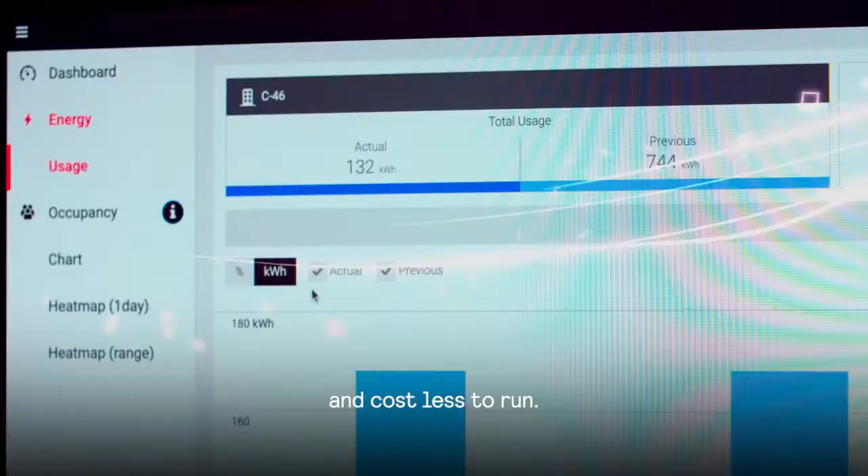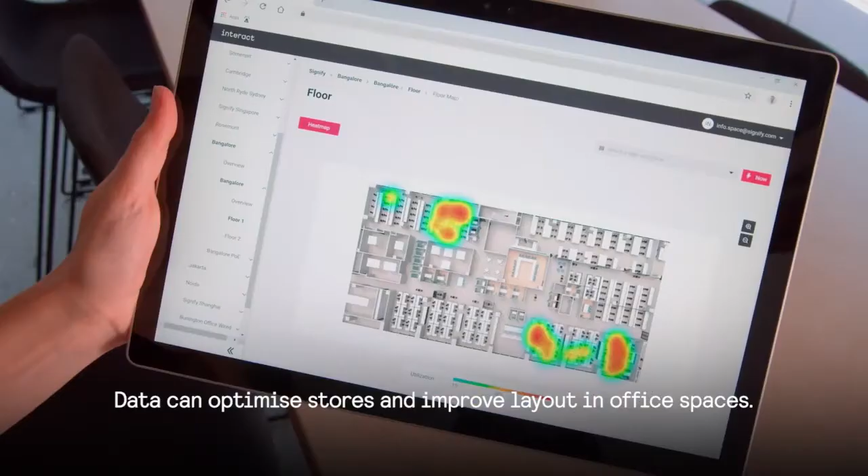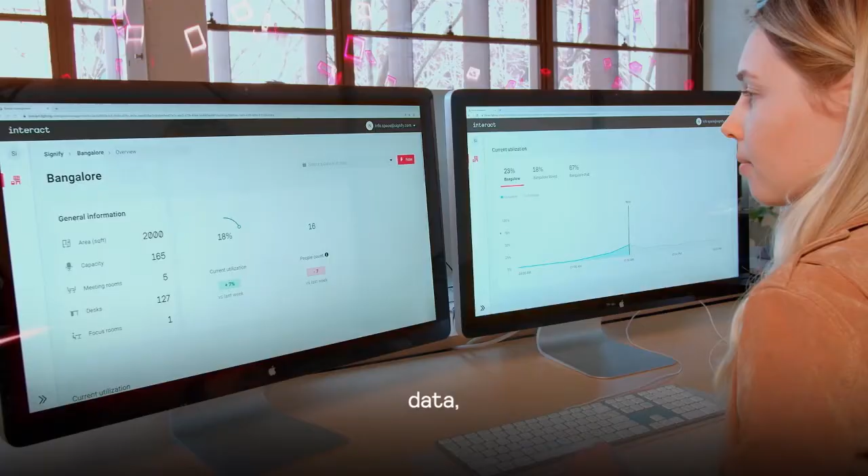Light now brings you insight. By collecting data, it enables intuitive buildings and efficient cities that are easier to manage, plan, and maintain, and cost less to run, so you can locate a free desk, an empty meeting space that's nearby, or an item on your list. Data can transform service and streamline operations so that they're more efficient. Light can make you more productive by adjusting to the way you work. It can help you wake up refreshed. Data can optimize stores and improve layout in office spaces. It can create safer conditions through predictive lighting maintenance and automatic illumination in cities and factories. It can inform environmental monitoring for healthier buildings. By integrating light, data, systems, dashboards, and developers, Interact creates light that informs. Light that beautifies and excites. And data that illuminates.

In this presentation, I'm going to talk a little about the history of how we arrived at the current moment in lighting technology, define some key terms, and then give an overview of what Interact is and what Interact lighting software and systems can do for businesses and cities.

Then, without getting too technical, I will talk about how Interact works before giving a rundown of what Interact offers in the different business sectors for which we have designed solutions. Finally, I'll give an overview of the Interact developer environment community and support that Signify provides Interact customers globally.

First, a little history. Signify started life as Philips Lighting, one of the first manufacturers of electric lamps in the late 1800s, and a global leader in lighting for the past 125 years. In 2008, Philips became the first company to produce a viable LED replacement lamp for consumers, and also became a world leader in professional LED lighting with its acquisition of pioneering LED luminaire maker Color Kinetics.

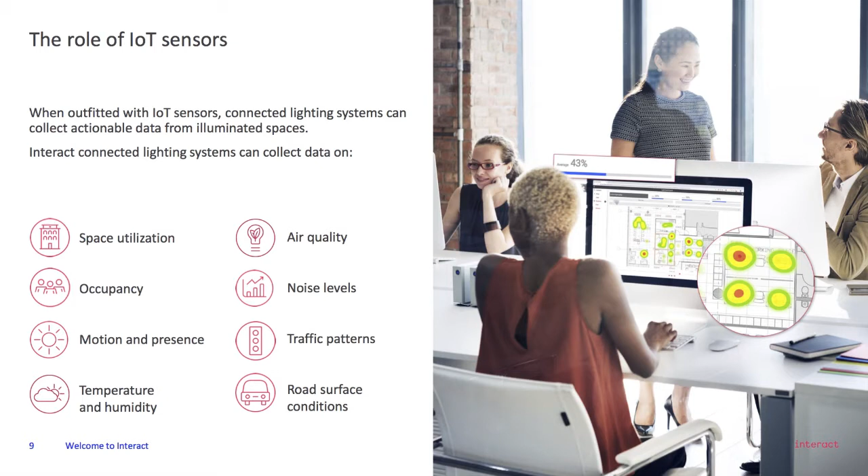When outfitted with sensors of various kinds, connected luminaires can also collect data about the spaces they illuminate. This data can be gathered, stored, and analyzed to provide new business insight and to drive new applications that deliver both superior lighting capabilities and capabilities beyond illumination.

This, in a nutshell, is what Interact is all about. And when we talk about Interact, we can really talk about it in 5 different but related ways. First of all, we talk about Interact as both the lighting software that works with connected luminaires, sensors, and other devices in the lighting network, and also as the connected system itself, which includes the Interact IoT platform.

I'll talk a bit more about the Interact IoT platform later, but briefly, the platform stores data gathered from lighting system operations and the professional spaces that the lighting systems illuminate, allowing managers to analyze that data for deep, actionable insight.

From a lighting perspective, Interact is lighting system monitoring and management software, which uses the two-way connectivity of luminaires and other system devices to keep track in real time of what's happening in the system. This includes system status, energy usage, occupancy and traffic patterns in indoor spaces, the ability to group and zone luminaires for better management and monitoring, and automated fault detection, all accessible through browser-based dashboards for centralized system control and operational visibility across an entire organization.

From an IT perspective, Interact offers IoT capabilities to the users of spaces. Lighting systems represent a natural way of distributing smart systems in illuminated spaces. Lighting is already installed where everybody needs to go. It's powered, and it's typically overhead, which is an ideal location for deploying sensors throughout a space.

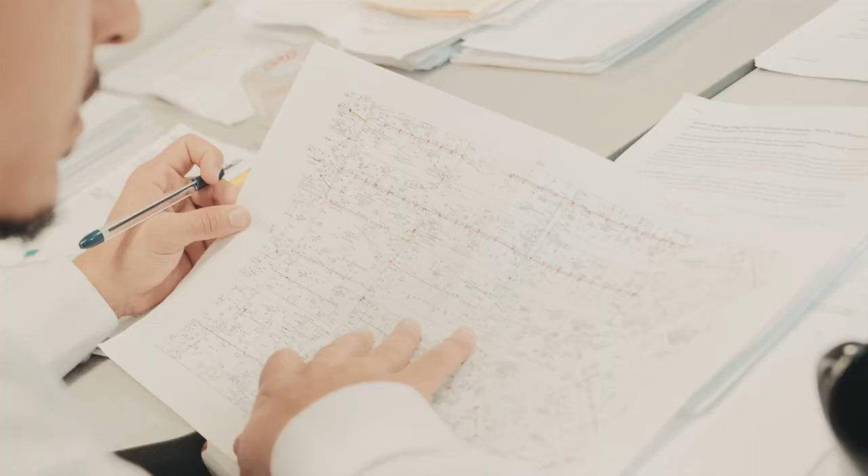When we first started the streetlight conversion project, it was about reducing our carbon emissions. But as we looked at the technology and as we saw what was possible, it really became about social justice and equity issue. We're about 70% through the conversion, and we've already seen $2 million in savings.

And that's part of equity too, right? If we can ensure that we're reducing our costs, that provides us with funding to make sure that we're able to settle our union contracts and pay just wages to our employees, and then have resources to focus on issues that are important to our neighborhoods.

What we're looking to do in White Plains right now is to explore every opportunity we can find to do our part to try to decrease carbon in the atmosphere, to try and make the city a safer place. We have to look for ways to save money.

Many cities are in situations where even issuing bonds can be a problem because of their debt limit and things like that. And NYPA came and actually did a whole matrix for us explaining how much money we can save by moving ahead with this all at once. The savings would outweigh the cost of the program, including the installation and the purchase of the fixtures.

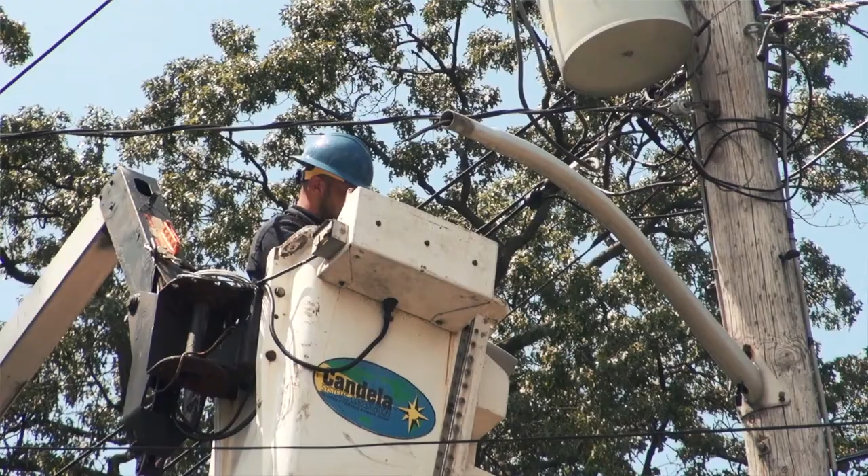The lights are probably good for 25 years. You're getting a better quality, a better outcome. You're saving the taxpayer money both immediately on the electric savings, but long-term on the maintenance savings. Our lights were completely deployed in about a 9-month span, and it was done with really no impact on our staffing.

Streetlights are an important asset within a community, as they are typically installed throughout all the neighborhoods. The streetlight system acts as the critical backbone for smart city deployment by providing the physical infrastructure to install IoT devices. The lamps allow us to attach other technology.

So in areas where we have lack of access to the internet, it opens up the possibility for us to find a partner who can provide internet services in our lower income neighborhoods. Cobra heads, we converted about 9,600.

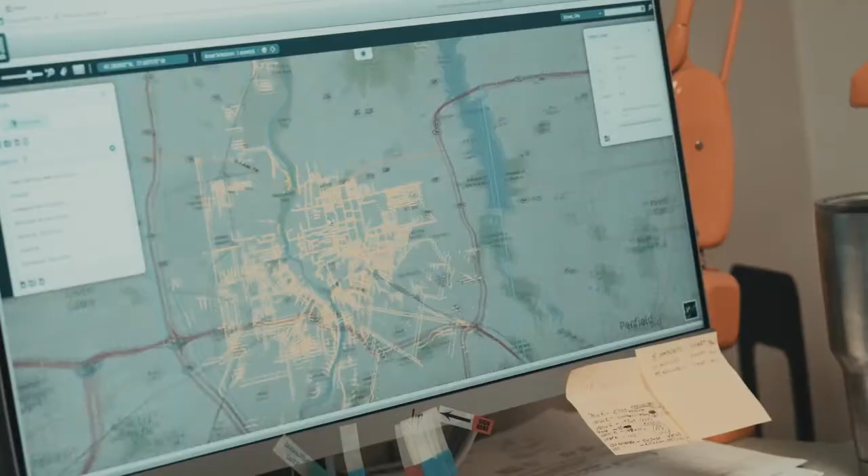In the next phase, we continue to pursue smart city initiatives. I think this is just the beginning, and I hope Interact continues to advance so we can take advantage of those things. I wanted to plan for the city of the future. We need to ensure that we're investing now for generations to come.

In indoor, Interact provides several software suites for different kinds of spaces. Interact Office for smart buildings, workspaces and educational institutions, Interact Industry for warehousing and manufacturing, Interact Retail for fashion shops and food and large retailers, and Interact Hospitality for hotels.

Let's take a look here at Interact Office, as it has the greatest number of software applications, many of which it shares with the other indoor software suites. For the managers of workspaces, Interact Office features a dashboard for real-time monitoring and management of the lighting system, similar to the one for Interact City.

But instead of a map of city streets, lighting system managers can see luminaires deployed across a floor plan of the illuminated space. Also, like Interact City, data-rich automated alerts signal system issues and speed repair and recovery.

Space optimization is an important consideration for most businesses and corporate real estate managers. With occupancy and activity sensors, Interact Office can give both real-time and historical views of space usage, allowing managers to identify underused areas of floors that could potentially be closed, lowering costs.

So we use real-time data from Cisco CMX to count people. We use real-time sensor data from Signify multisensors to measure, for instance, temperature and humidity.

You can think of a digital twin as a bridge between the physical and digital world. This pairing of the virtual and physical worlds allows analysis of data and monitoring of systems to head off problems before they even occur. In the building, we have several technologies to support space optimization.

As a base technology, we have used Wi-Fi triangulation based on Cisco CMX. So we combine this technology together with Signify visible light communication, and the resolution here is about 50 centimeters.

The Interact Office solution from Signify is based on open APIs. This means that the solution integrates with Active Directory and Exchange. It integrates to meeting rooms, users, calendars, and other resources in the building.

We have lots of happy employees, I would say, and I think that's because of the environment that we have created with the lighting and so on. We are moving now into a place where we can really decide ourselves where I want to sit, how I want my environment to be.

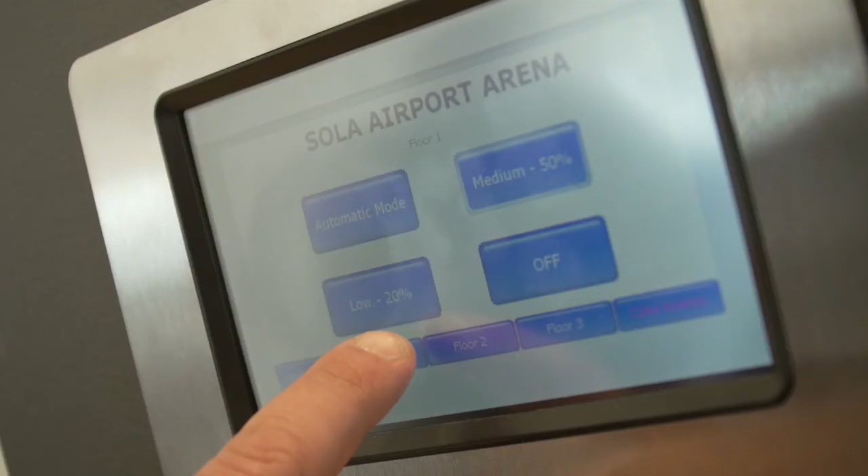We're really moving on and learning as we go, expanding and searching the possibilities. So for the next years, I hope the smart office part will really be our sweet spot. I've said it to my employees, we're not finished and we will probably never be.

I've mentioned APIs quite a bit, but Interact has created a developer partner program with a whole array of support for third-party developers who want to develop new apps and integrations on top of the Interact IoT platform.

Finally, I'd like to mention some of the programs that Signify has in place to support Interact system design, financing, and operations. Signify system centers are located around the world for design and implementation support. Signify Capital can help organizations find innovative financing models, remove barriers to adoption based on budget constraints. And our global alliance partners, such as Cisco, Ericsson, Vodafone, and SAP, work with us to co-develop new connected lighting propositions that extend the functionality and value of the Interact system.